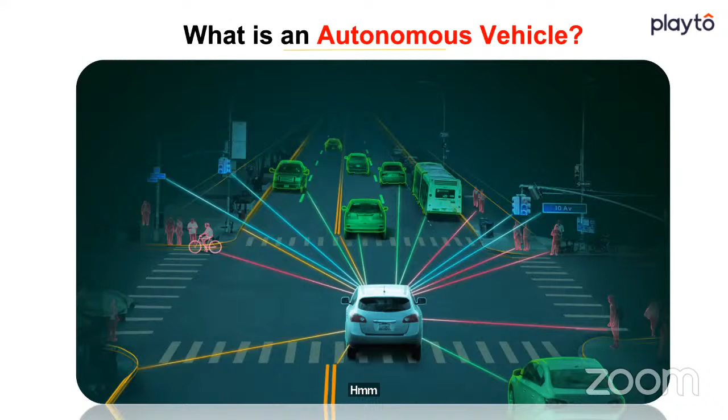I think Saniya can explain that better than me. Hi everyone.

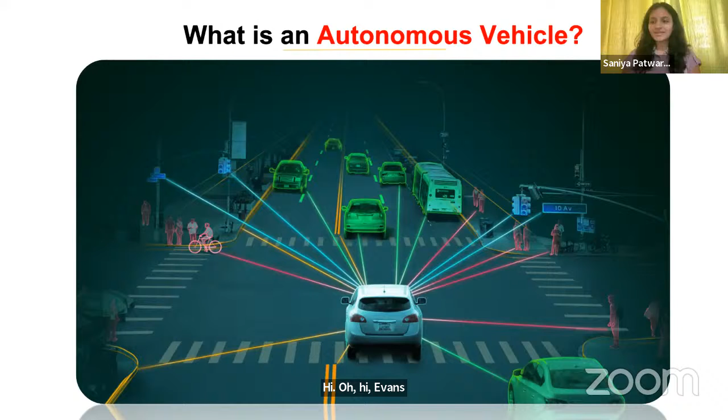As we've already been introduced, we were a group of final year BTech students wanting to put whatever we had learned till now into some practical use. Simultaneously we had a problem on campus: in the scorching heat of Gujarat, getting up from our hostels and going to classes every morning became a little hectic. So our professor Harish sir came up with the idea of creating an autonomous campus shuttle for use on campus.

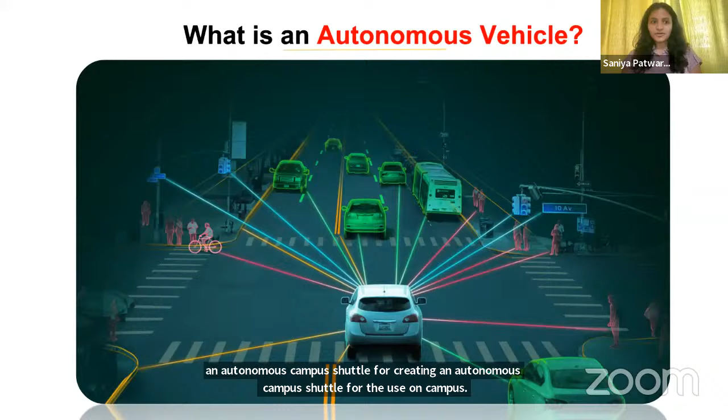We couldn't directly get an electric vehicle, so it started out as a hobby project on a student-made go-kart. The vehicle you can see in the PPT is a student-made go-kart built by some of our seniors. We made modifications, worked in the machine shop, worked on the steering mechanism a little, added some actuators, and then made this vehicle autonomous.

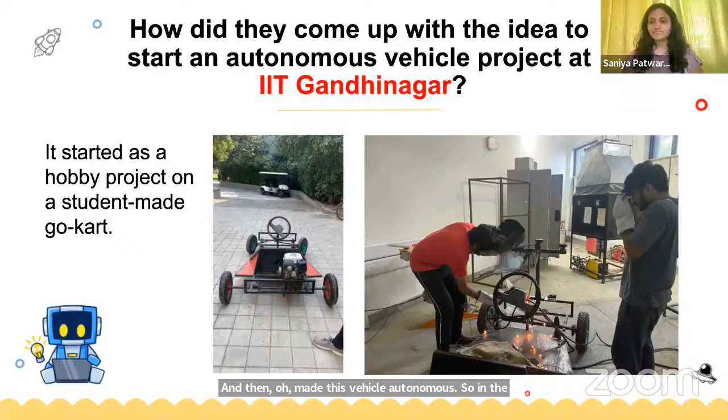In the next semester, we got this vehicle, which is an electric vehicle manufactured by Savvy Electric Vehicles. We decided to make this autonomous, which is completely driverless, and we'll be speaking more about it today. Before that, let's look at a video about our current progress.

Most of the kids are eagerly waiting to see this.

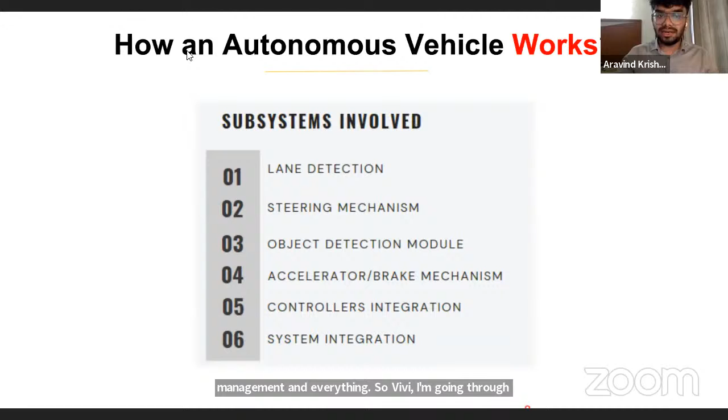The different subsystems involved are lane detection, steering mechanism, object detection module, accelerator or brake mechanism, controllers integration, and system integration. The system integration also includes power management and everything. We'll be going through all these different subsystems in detail, in a way that all of you can understand.

In the first week, we were given the task to create a concept map. Can we go on to the next slide? This is a basic concept map which gives an idea of how our entire vehicle works.

Can we go to the previous slide, please? One thing to be noted is that the vehicle will run only on a pre-decided road, and we are following only class 2 automation. When our vehicle sees an obstacle, it just stops, and when the obstacle moves away, our cart will again start moving. It doesn't avoid the obstacle and move around it. The third important point is that we are not using GPS for navigation.

As you can see in the image, we have different systems like the brake and speed subsystem, the steering subsystem, the obstacle detection, the lane detection, and we have also provided a manual override just in case there's an emergency situation where we need to control the entire system ourselves.

There are two different types of manual override. One is using an RC controller, which all of us have seen from our childhood to control small RC cars. We've implemented that so we can directly control the entire cart with an RC controller. Also, we can physically override it by getting into the vehicle and riding it. So that's about how the vehicle works in general.

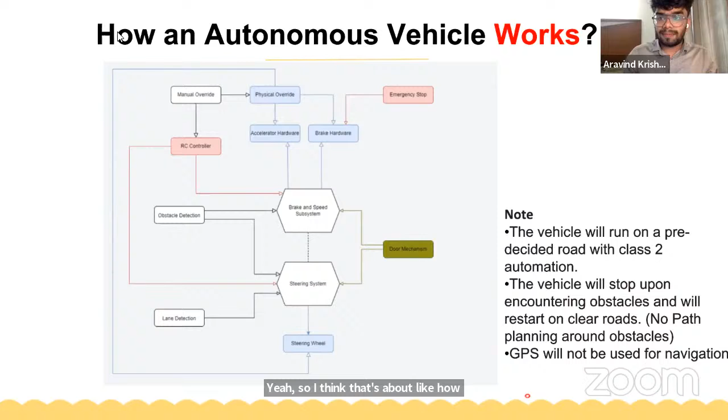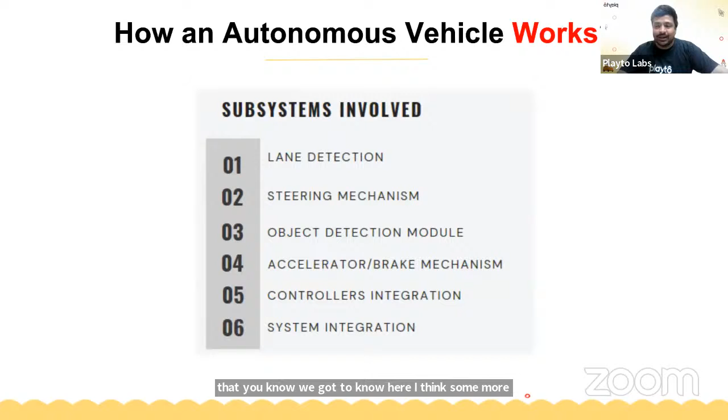Okay, got it. So can we also know the step-by-step process, and how we did it, so that kids can get more details about all the different aspects. I think some more information here would be more helpful. Yeah, I think one of my team members will explain how we implemented lane detection.

Hi guys, I am Anawat Pandya. I'll explain what lane detection and steering mechanism is and how they work. I hope you are excited.

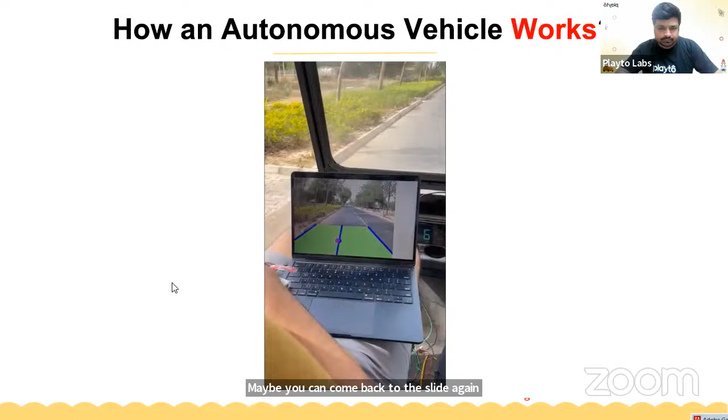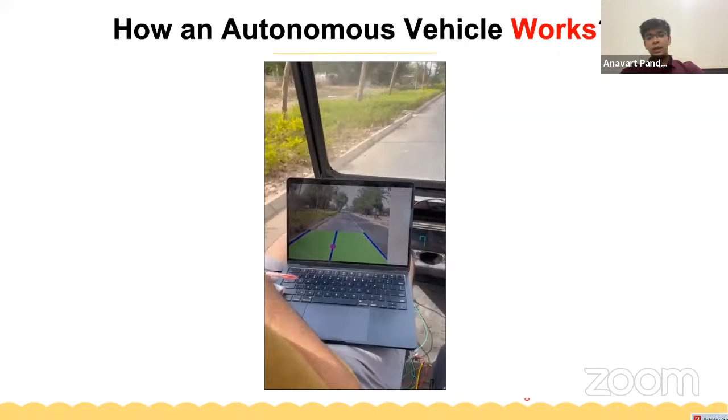As you can see, the two lane lines are getting detected and the region between them is getting detected, along with a center line. The blue dot is the detected center and the pink dot is the fixed frame. What we are concerned with is the error between those two.

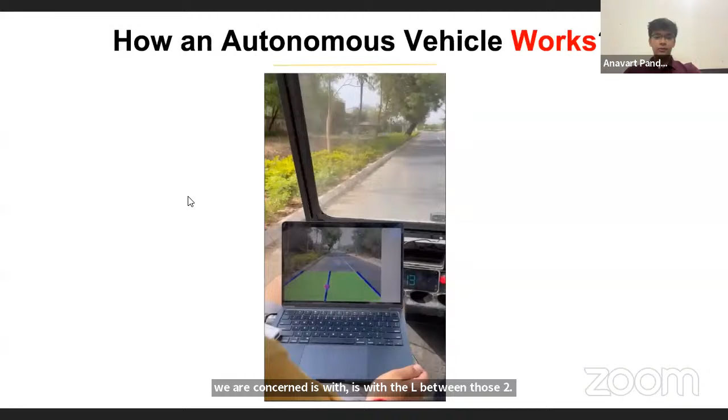Maybe you can move to the next slide. Now something hands-on: we have a steering mechanism. As you can see, we have a chain attached to a motor on the right-hand side and the steering axle on the left-hand side. When the motor rotates, it rotates the steering axle. We have some gear ratio between the two, and the chain mechanism allows both gears to move in accordance.

So what we do is power the motor through a power supply, and send the command PWM signal to the motor. That PWM signal is sent through an Arduino board - I hope all of you have used one such microcontroller board. How does the Arduino know what command to send at every instant? We have a Python code in a loop. When we run the Python code, it captures the feed from the camera and does the processing as I mentioned earlier. It applies the 6 steps of processing and gets the error distance.

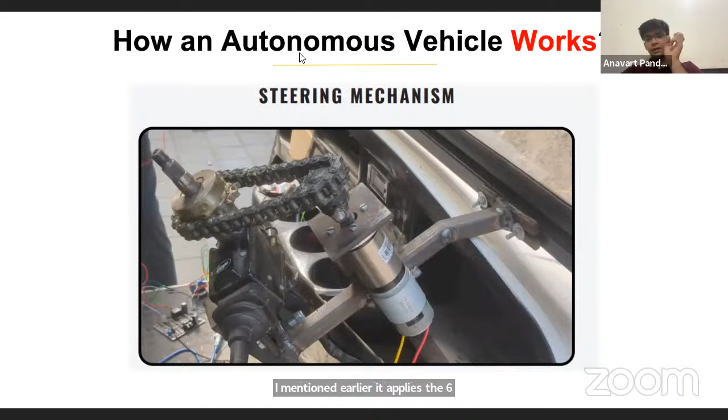Then we have a code block called PID control. What does that do? It converts that error, applies some complex mathematical functions, and converts it into a PWM signal - you can understand it easily as a voltage signal. It ranges from 0 to 255 and has two directions, either clockwise or anti-clockwise, plus or minus. So the algorithm discussed previously, along with the PID control code block, decides whether to send a plus or minus signal to the motor, saying whether the motor should rotate anti-clockwise or clockwise and with how much voltage - how much torque, you can understand, having a value from 0 to 255.

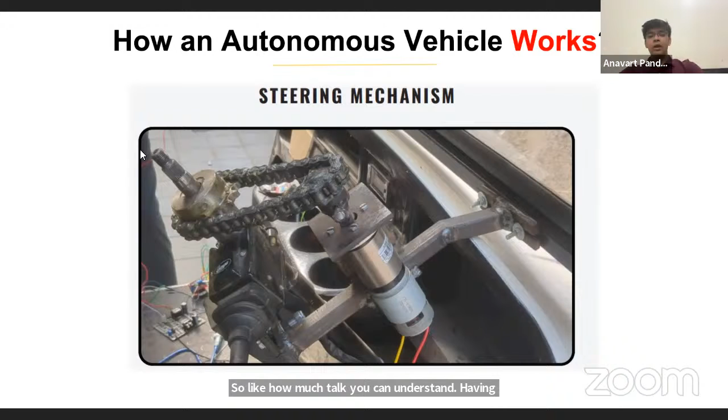I guess we should see this in implementation. Next slide - this is the same video we showed earlier, but I'd like to specifically focus on some part of it. Maybe can you move to the 40 seconds mark?

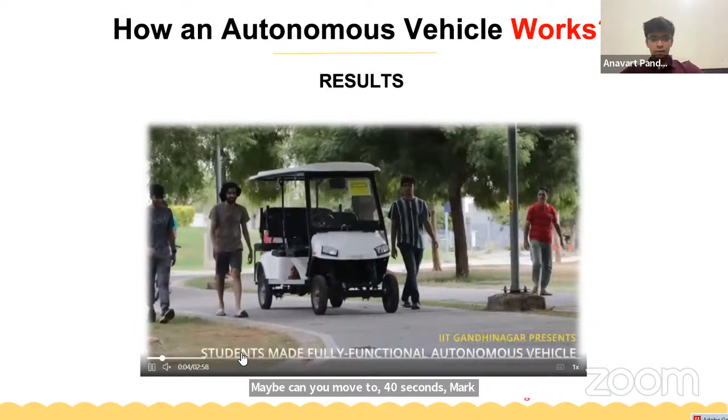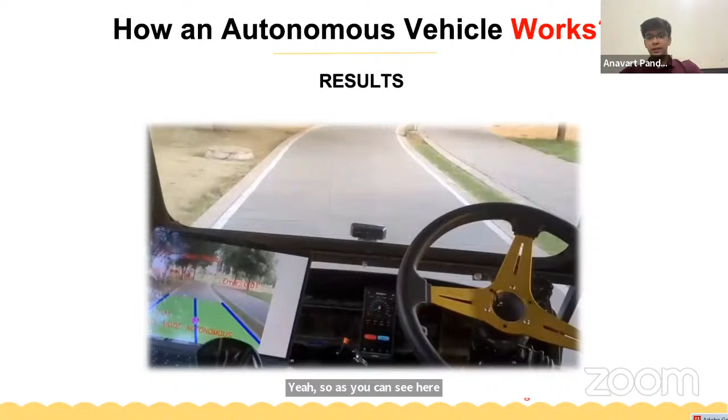Yeah, so as you can see here, the lane detection is happening on the left-hand side, and on the right-hand side, the steering wheel is moving on its own. Can you pause the video for a second?

So as you saw earlier, the lane detection was happening and the steering was rotating. So all the process was happening in real time that I explained right now.

What you can see now on the video frame is that we have another mode, which is joystick enabled mode. So in some cases, if there is a failure in detection of the lane, or if there is a failure in moving the motor in the right time, we can stop it. We can override it by manually controlling through a joystick.

So we have a joystick that you can see I hold in my hand. For a better look, I have it with me. You can focus on my frame. So this is a joystick. It has multiple axes. It has the throttle axis and it has the rudder axis.

Basically, I am using a rudder axis, and when I click the red button, it changes to a joystick mode immediately. So now you may play the video.

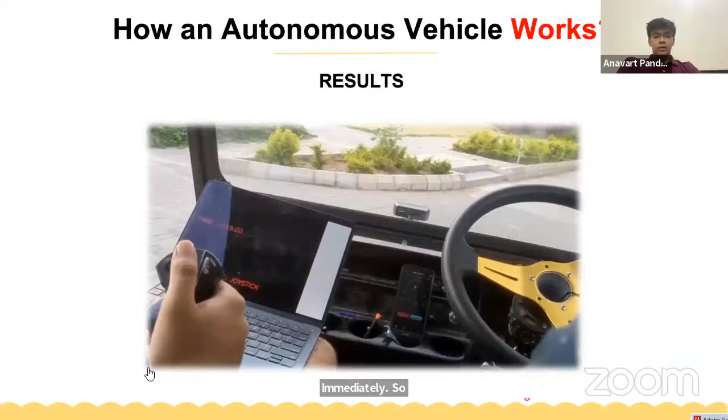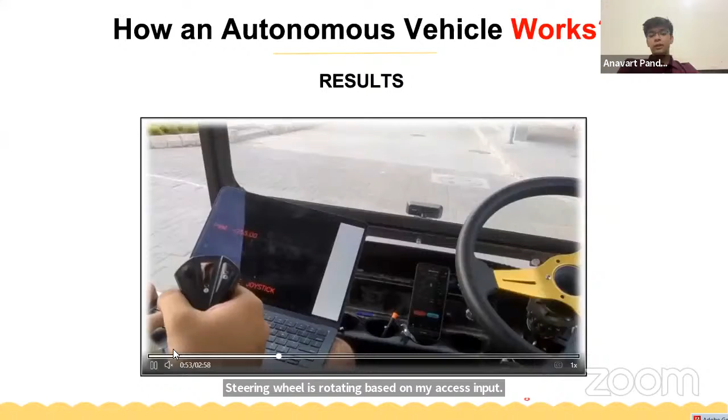As you can see, the computer is taking the input of my joystick, and the steering wheel is rotating based on my axis input. So this is all about the lane detection and steering mechanism autonomy, along with a joystick manual override feature. Thank you so much.

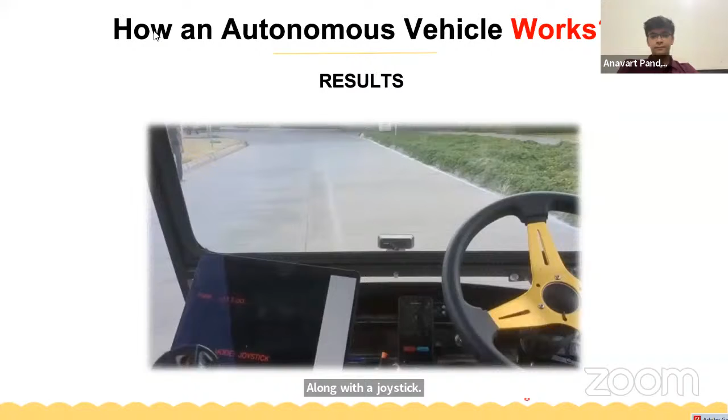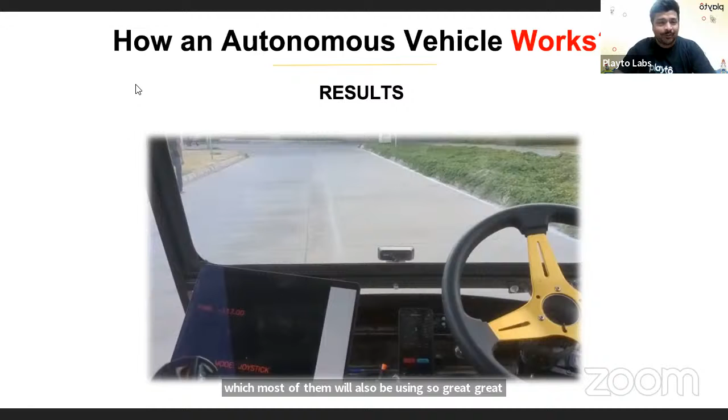Great. I think kids must have been very excited to hear that you have used Arduino and Python, which most of them will also be using. So great, great. Yes. So what about the other systems in place, right? How do we do it in detail? I think most of the questions were around the sensors, like what kind of sensors are used, right? So if we can answer that question and take us through the further topics, it would be good.

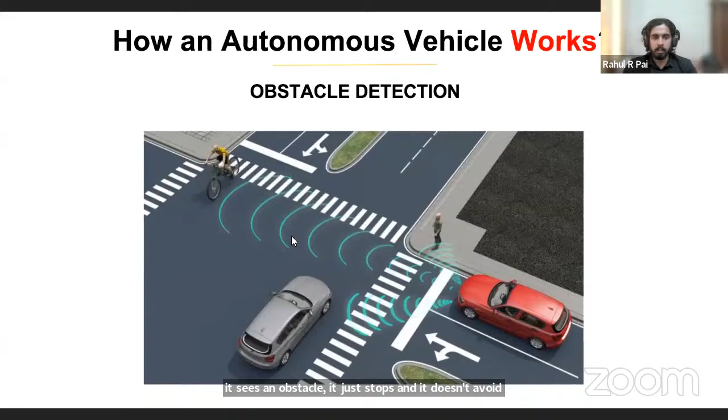Yes, sir. So I'll be going through the obstacle detection. So another part of the autonomous vehicle is the braking and the acceleration system. So we also have to consider any obstacles that are coming into the path right now. So at this point, our vehicle, when it sees an obstacle, it just stops and it doesn't avoid the vehicle and move around it. So I'll just go through what all we have implemented to get these features. Could you move to the next slide?

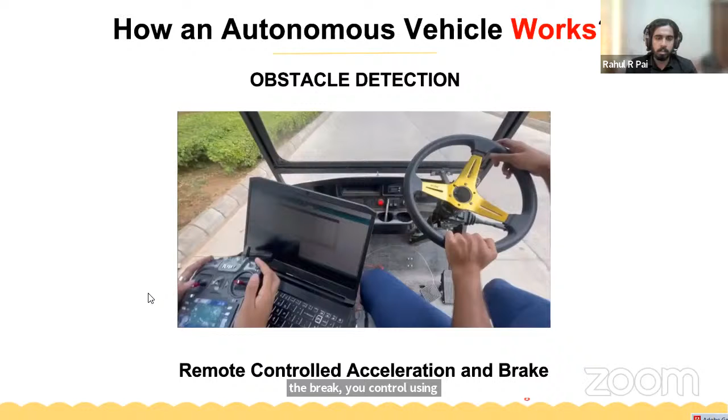Yeah, so initially, before even implementing the autonomous system, we made the acceleration and the brake control using the RC control. So this is a video showing how we control the acceleration and brake using remote control.

So you can see that I've toggled the switch and the vehicle stops, and when I release it, the vehicle moves back. The driver here is just steering the vehicle. He is not touching the acceleration brake pedal. So can you move to the next slide?

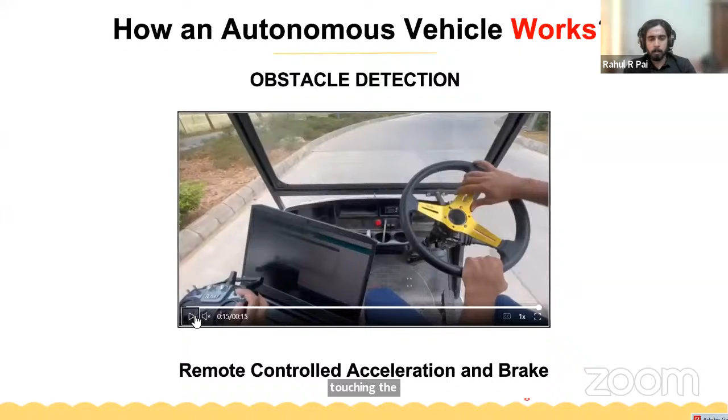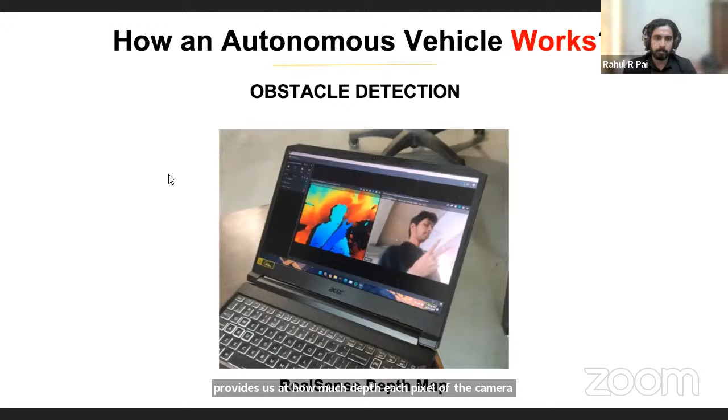This is a video of how we implemented it. You can see the live mask on the left side and the raw feed here, and you can see the detected person here. Can you play the video?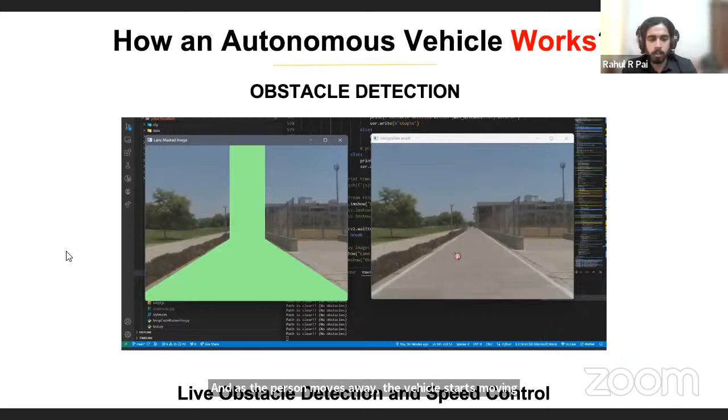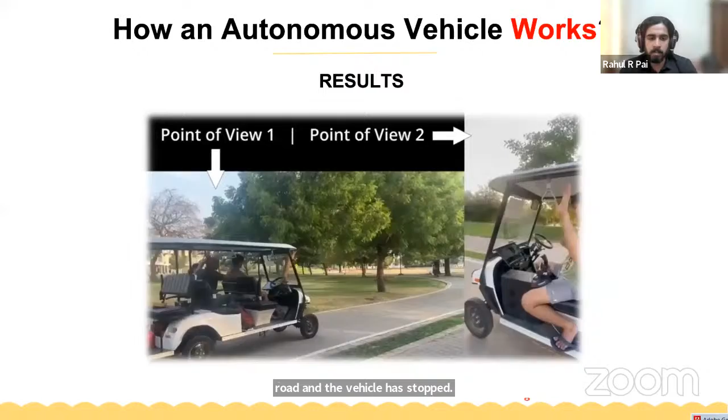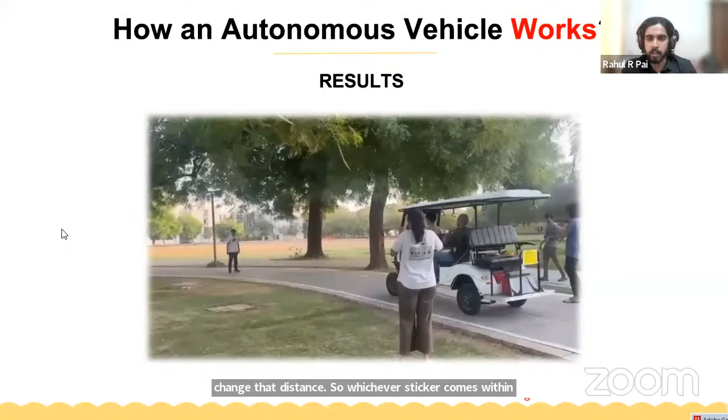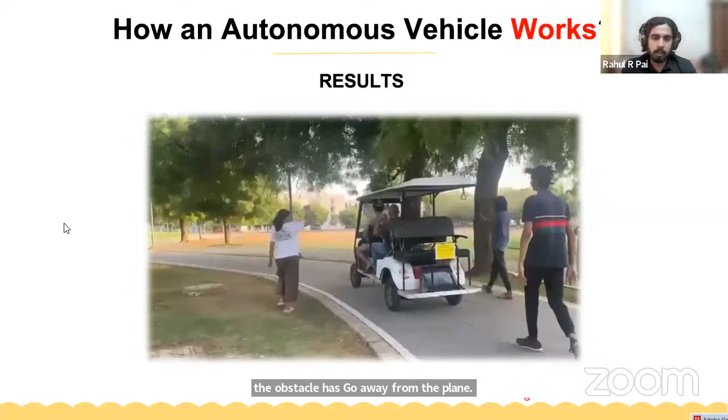This is part of the obstacle detection being live implemented. You can see a human object standing on the road and the vehicle has stopped. We've implemented this at 5 meters, though we can change the distance, so whichever obstacle comes within 5 meters in front of the vehicle will stop. It starts moving again once the obstacle has gone away from the lane. We've only implemented obstacle detection for the front of the vehicle, not the sides. That's how the obstacle detection works.

Okay, great, I think that's some insightful information we've received, and I think kids have a lot of questions now. So we can take a few questions and then continue further.

A lot of questions were around sensors. Can you tell me what sensors we used in this? Is it just the camera sensor, or do we have other sensors in the vehicle?

I'll answer that. For both the lane detection and obstacle detection, we've used only cameras - one RGB camera, the normal webcam we use for lane detection, and the other one is the RealSense camera for obstacle detection.

Okay, got it. So the whole autonomous system is working based on vision only, not IR sensors. Okay great, so what the kids have used is an advanced version, but the principle applies the same.

Mayank asked one question: can it detect any potholes or any kind of obstacles on the ground, not just a real person?

I'll tell that again. We've used a YOLO model here. The YOLO model has pre-trained classes - several classes like humans, vehicles, plants, animals, etc. But right now it doesn't have potholes. In case we need potholes, we'll have to train the machine learning model again to detect potholes.

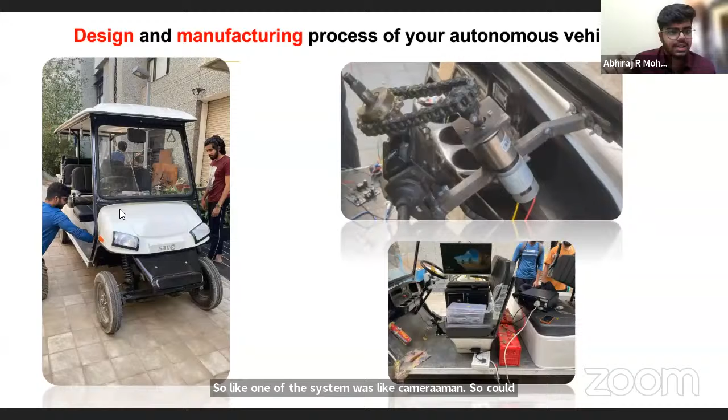Keeping this in mind, we had to add a lot of systems. One of the systems was the camera mount. Could you take back to the previous slide? Previous slide. One more. Yeah. Once.

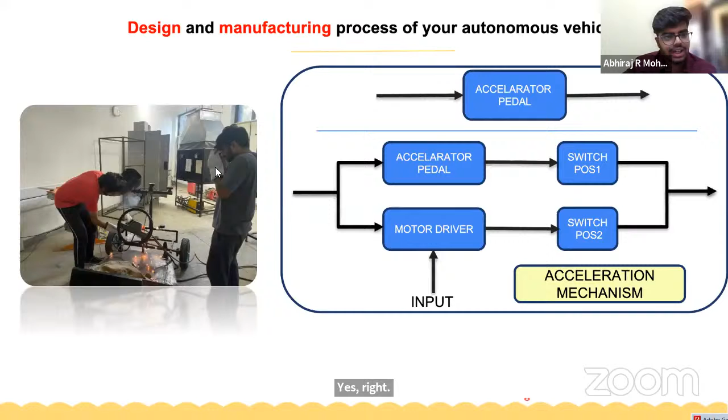Here you can see us in the left picture building a structure onto the go-kart. The go-kart was one we worked on in the previous semester. We had to make sure the cameras were at a certain height and that the vehicle vibrations would not make it to the camera, so we had to make such a structure. But when it came to the golf cart, which was electric and had much more complex suspensions, we could do with a simple mount. So that task came through very easy.

From one to another, but the other actuations like steering mechanism, acceleration, and braking were complex and did have a lot of addition. So I can talk you through how we did the acceleration mechanism. Acceleration for the electric golf cart was electric, so it didn't need any mechanical actuation as such. What they did have was an accelerator pedal that controlled the voltage.

So what we did was add a secondary circuit. Basically we are giving an input, and if you flip a switch, the secondary circuit which we are giving the input through would be the one controlling the vehicle. By controlling the switch, we could determine if the accelerator pedal is working or if the command we are giving is working. That's how we figured out the acceleration mechanism. This was not our first choice; our first choice was mechanical linkages, but this was the one that worked out in the end.

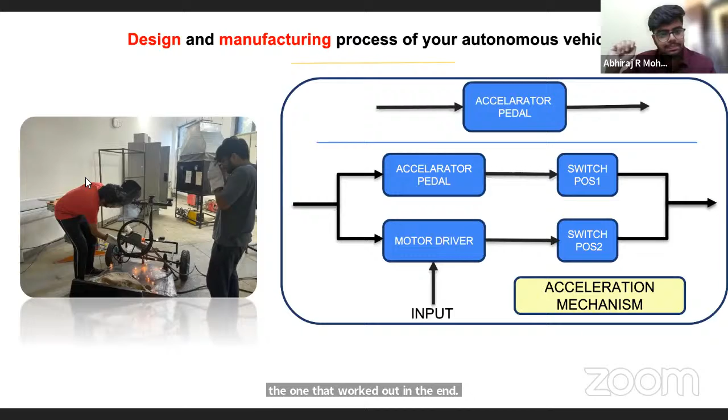Could you move on to the next slide, please? Similarly for the steering mechanism and the braking mechanism - for steering, as my fellow teammate has been talking about, we used a chain and sprocket mechanism. We had a motor, and the motor mount was fixed to the frame, but again this was removable in nature. For the braking as well, we had a motor with a winch-like mechanism that pulled along the brake cable - that's how it worked. I should again put emphasis on this: it was not our first choice. Our first choice was other ideas, but this was the most practical as well as feasible idea.

The other thing was we needed a computer on the system, because all of this is a computationally heavy task. So we needed to have a computer on the golf cart as well as a power source. What we used was we kept a PC in the footwell of the passenger side, in the front. The picture we have is not the final one - the PC was kept in the footwell, and the inverter was kept behind. We had seats for the passenger itself.

Again, such ideation and brainstorming was needed. Having a power source that could power an entire PC on board was challenging as well. So a lot of tinkering, a lot of ideation, a lot of brainstorming was needed, and we had to keep an open mind for this. We couldn't fixate on one solution, because in the end it might not work out.

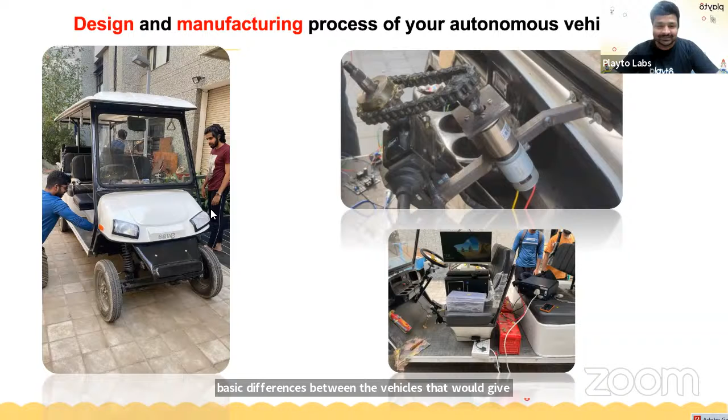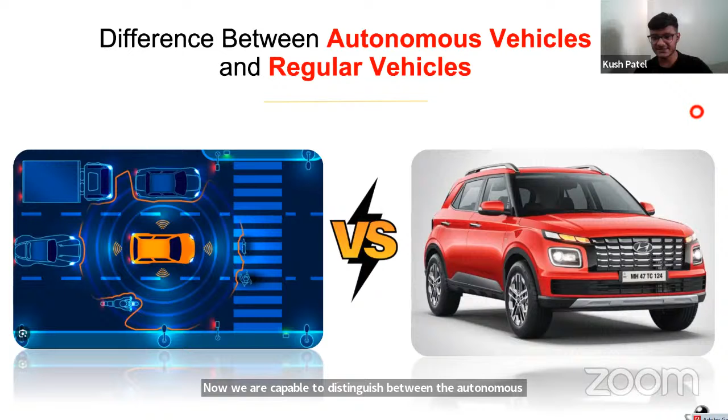Yeah, I'll answer that question. Hello everyone, myself is Kush Patel. So let's talk about the basic difference between the autonomous vehicle and the regular vehicle that we used to drive, right? After hearing all this information, like all the subsystems, lane detection, obstacle detection, brake and acceleration system, now we are capable to distinguish between the autonomous and the regular vehicle. So let's take a look at a few features based on which you can differentiate the two vehicles.

First of all, definitely it's about the driver. In the regular vehicle we need a driver, but in the autonomous vehicle, the vehicle can drive autonomously. The second and third features are slightly overlapping, like the automatic control and the smart decision. In a regular vehicle, the person is driving the vehicle, right? So based on that, the person observes the outer environment and makes the decision like when should we apply the brake, when should we apply the accelerator. That's all included in the manual control by the human perspective.

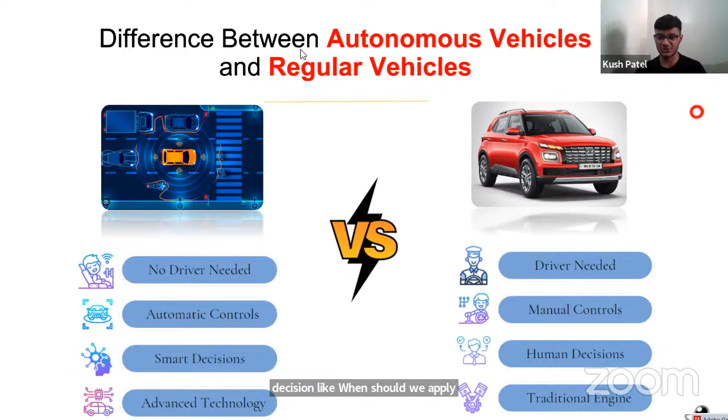But on the autonomous side, we have the automatic control with smart decisions. We have implemented in our vehicle the lane detection system, also the obstacle detection. So those are the smart decisions. Based on that decision, we have made control on the accelerator and the braking system. If there is an obstacle coming in the vehicle's main path, the brake will automatically apply. Then when the brake releases, the acceleration will automatically apply based on the given range of speed as well as the range of the obstacle.

The last point is about the traditional engine in the regular vehicle. Right now we have all types of vehicles which use petroleum-based fuel like petrol, diesel, gasoline, etc. But in the autonomous vehicle, the main part is they use advanced technology in terms of electrical systems, also hybrid engines. In our vehicle, we have given the golf cart, which is electrical. So there is no traditional engine mechanism similar to the regular vehicle. So yeah, these are the basic features that we can use to differentiate the autonomous and the regular vehicle.

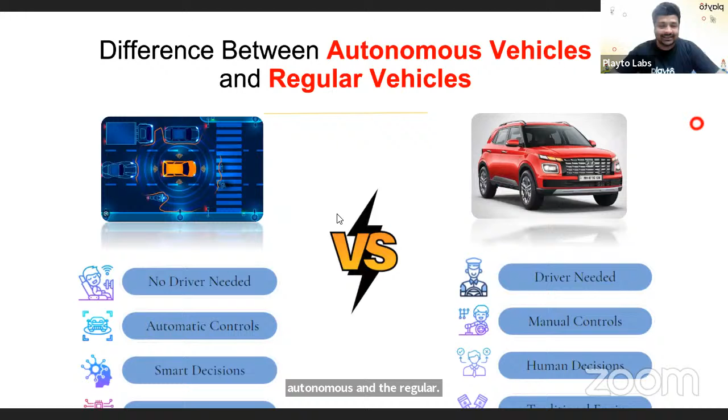So yeah, can we go to the next slide? Yes. So now the question comes in our mind: what's the future of the autonomous vehicle?

Right now a lot of research is going on based on hydrogen fuel. In the traditional engine, the combustion gas is carbon dioxide, which affects our environment. But in hydrogen fuel, the combustion gas is water, or water vapor. So it will be a more sustainable step towards the environment.

Also there is the super smart car, connected and communication part. Right now there is a lot of progress in artificial intelligence. In future, people can implement and integrate artificial intelligence into the current system, so the car itself can adapt to the outside environment, apart from sensor data, based on the training module and all these things. So based on artificial intelligence, we can proceed with further advancement.